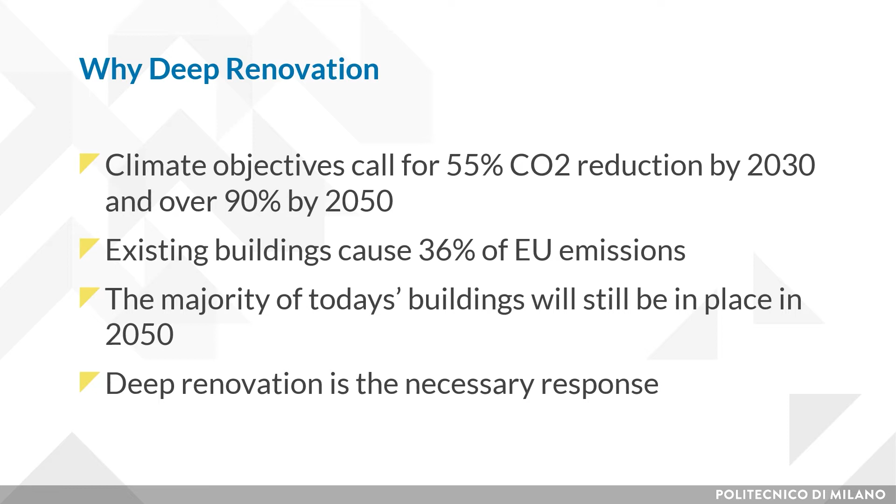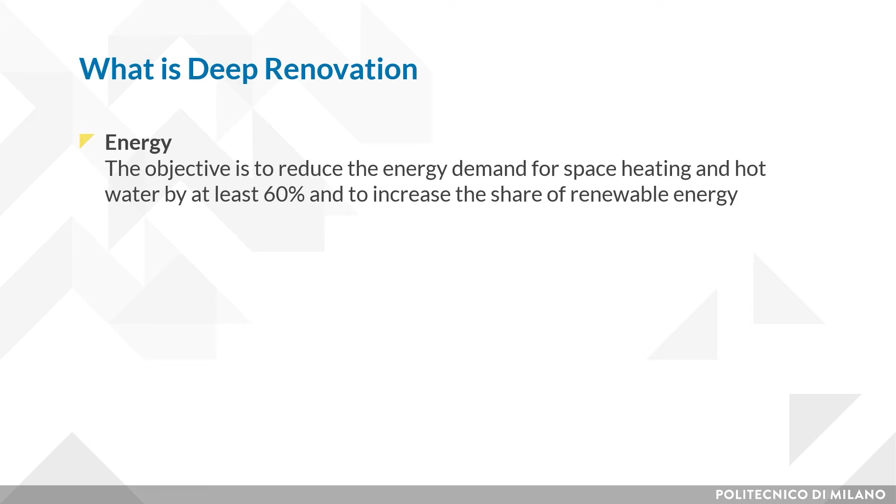Deep renovation can be characterized by a number of key performance indicators. The most important one is energy. The objective is to reduce the energy demand for space heating and hot water by at least 60% and to increase the share of renewable energy. But equally important, it is to achieve comfortable and healthy indoor air quality and good indoor temperatures, both in cold seasons and in warmer seasons.

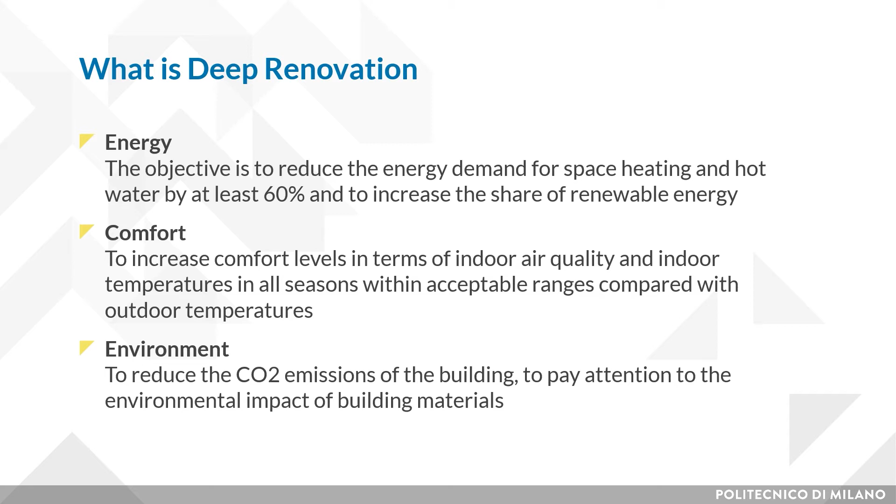Deep renovation is also important to reduce the CO2 emissions of the building, in the first place by extending the lifetime of buildings, but also to pay attention to the environmental impact of building materials which are used for deep renovation. When doing a deep renovation, there are of course risks, and they can be dealt with by integrating multiple components in elements so that there is an optimized prefabricated process before complicated components are being mounted on site.

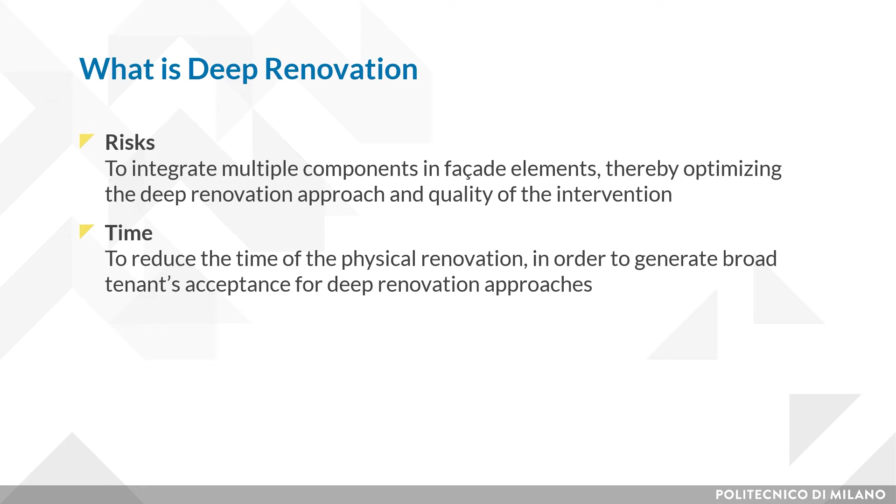It's also important to reduce the time of the physical renovation in order to generate a broad acceptance among tenants for a deep renovation approach. And finally, the costs are important. Deep renovation can be facilitated by prefabricated elements with the integration of many components, and this can help to achieve affordable building exploitation cost and affordable cost of living for tenants, and thus avoiding energy poverty.

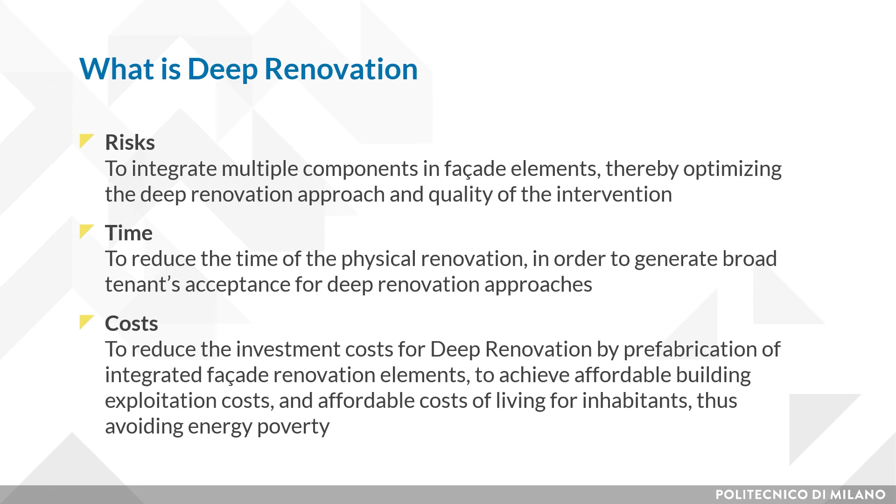The general method and approach that has been chosen in Horizon 2020 research projects is to look at different building archetypes. And also a project called 4RinEU has done the same. And this project made use of the TABULA building archetypes that had been defined under a previous program. And in 4RinEU, the geometries of those buildings have been taken and they have been adjusted to context-related thermal properties, both in terms of climate and typical construction methods.

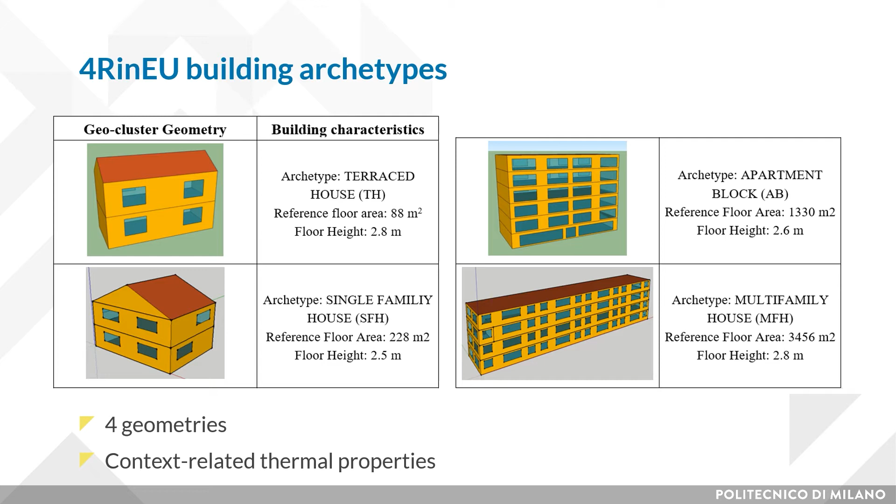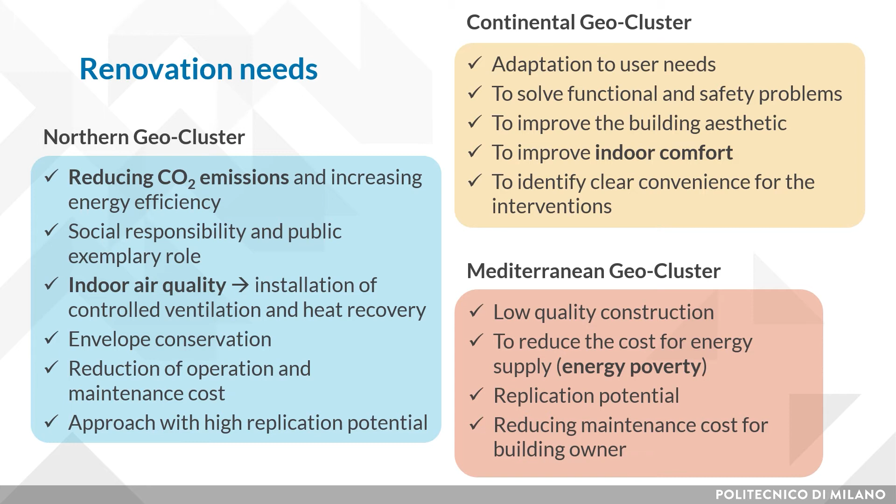Europe has been divided into geoclusters, and geoclusters are countries or member states with comparable climatic conditions, and these geoclusters have been used to study the deep renovation concepts. The renovation needs in those clusters have been taken as a starting point, and these renovation needs vary from project to project, of course, but they also vary from region to region. And to highlight a few, in the northern geoclusters, reducing CO2 emissions is an important one. In other areas, avoiding energy poverty is an important one. And in all cases, indoor comfort is a relevant one to address.

The following technologies for deep renovation have been studied in 4RinEU. The first and most important one is the prefabricated facade, which contains super insulation, good window frames, and the addition of shading systems where necessary. But there are more technologies that are also important to achieve a good performance. And the first one is to address summer conditions and to add, for instance, a smart ceiling fan in order to have a better individual control over conditions in summer.

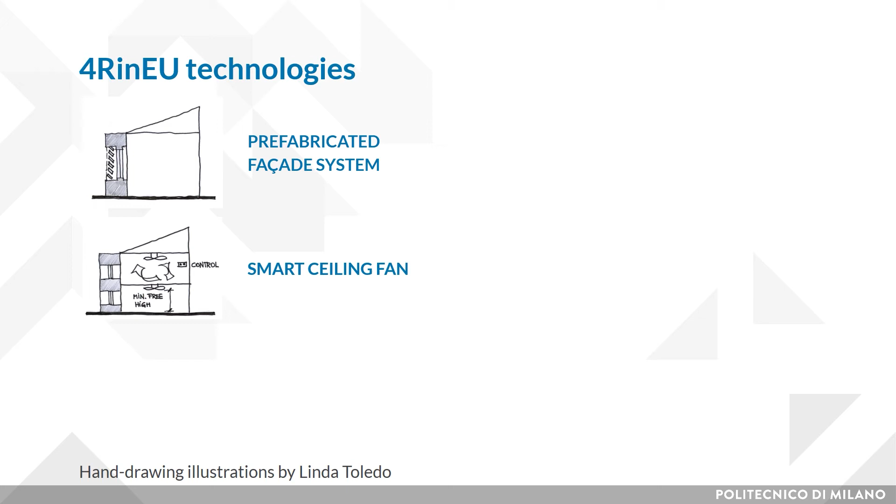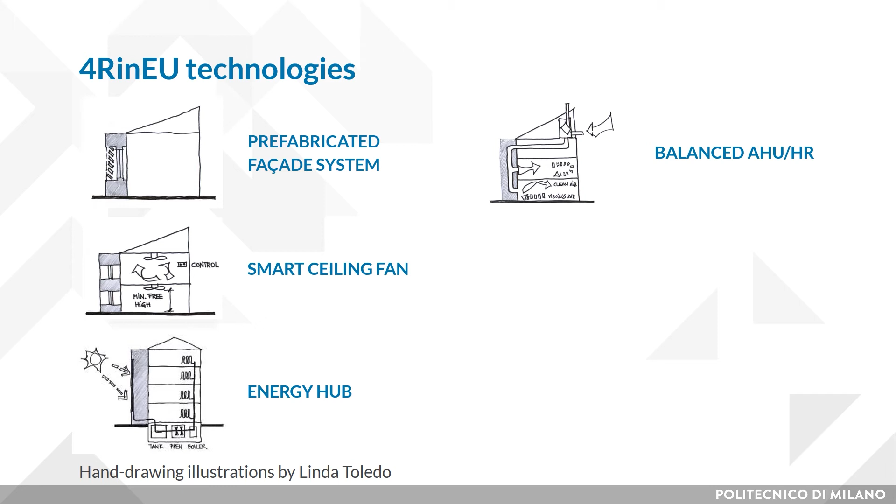The third one is the use of a so-called energy hub. Many buildings have a collective or communal heating system which can then be distributed better, making use of a so-called energy hub. The fourth technology is the use of balanced ventilation with heat recovery to make sure that there is enough fresh air in the apartments, but also to make sure that the heat of this ventilation air is recovered. Heat recovery can also be integrated in the prefabricated facade. In this case, we talk about decentralized solutions, because it cannot be a whole house ventilation system that you do in a facade for one apartment.

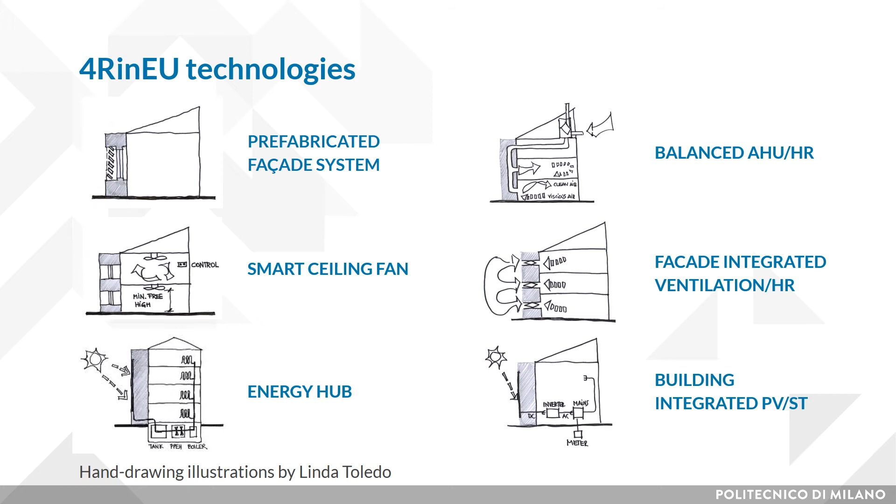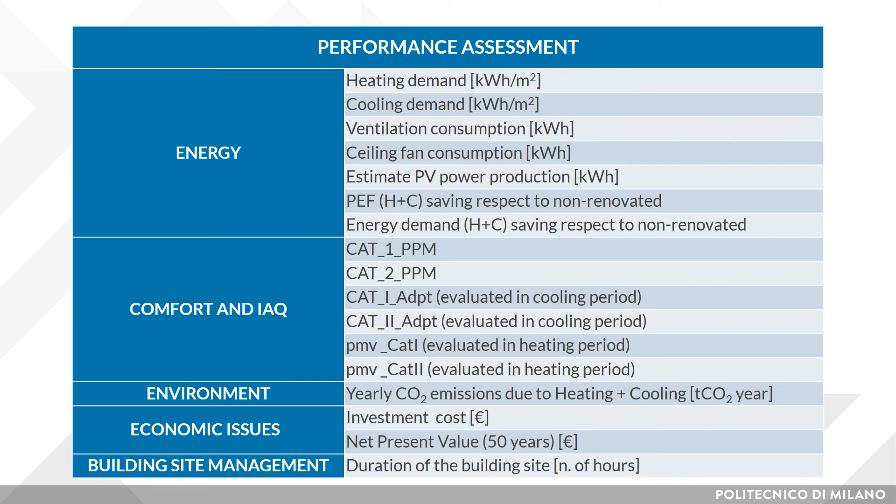And finally, the project has addressed the integration of renewables. This could be either in the facade and be integrated in this prefab facade, or in the roof. And the project has addressed both PV and solar thermal systems. All of this has been combined in deep renovation packages, where a performance evaluation has been made on the different key performance indicators that were introduced in the beginning, and they are listed here again in detail.

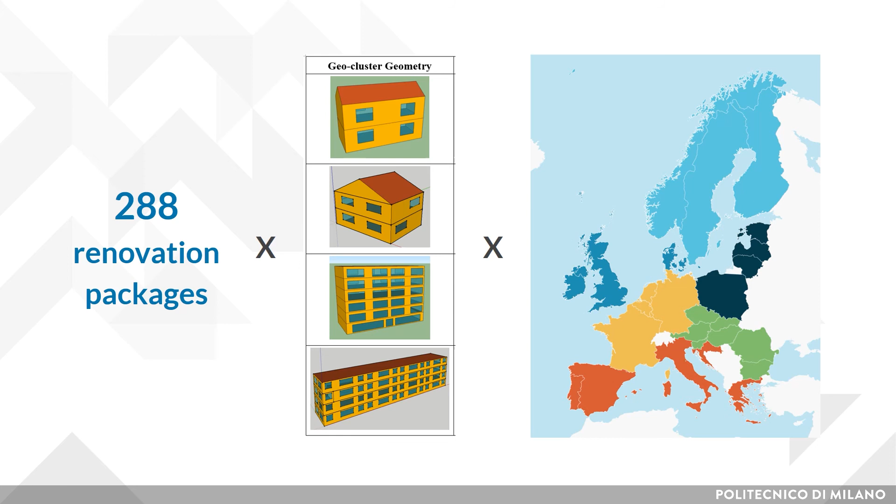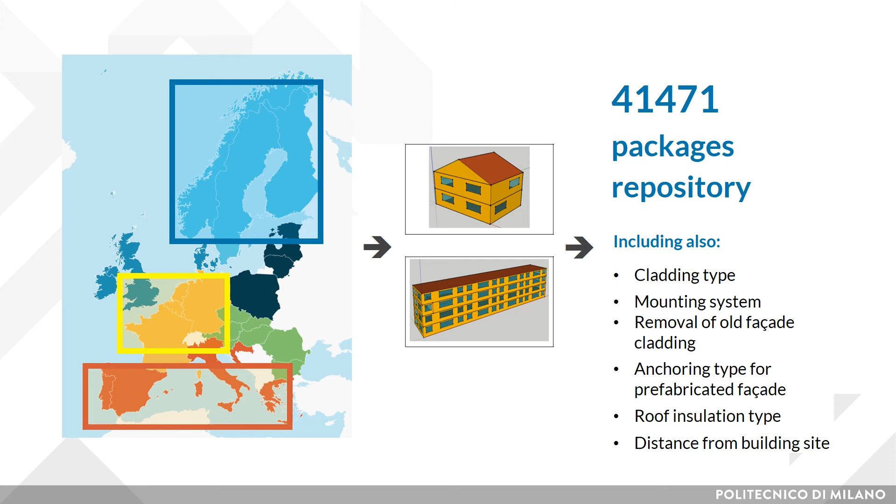And that resulted in 288 renovation packages times the different building archetypes that have been studied times the 6 geoclusters, and that resulted in a huge number of packages which are possible in the different areas and different geoclusters within Europe. And this is a huge information database that can be used as a starting point when planning a deep renovation in your own situation.

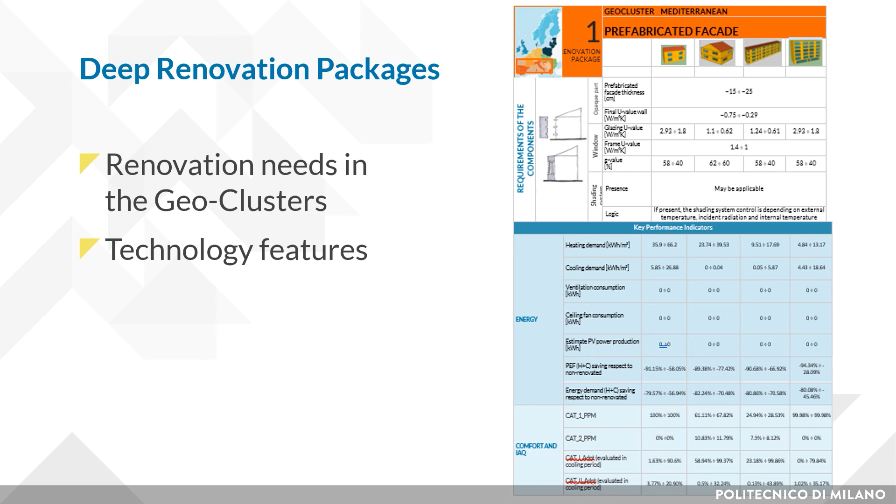So to summarize, a deep renovation package is characterized by the renovation needs in a geocluster, by the technology features that can be part of it, and it provides information for designers, and there are key figures in terms of performance that can be expected. And such information is a good help as an initial starting point to start a deep renovation project in your situation.

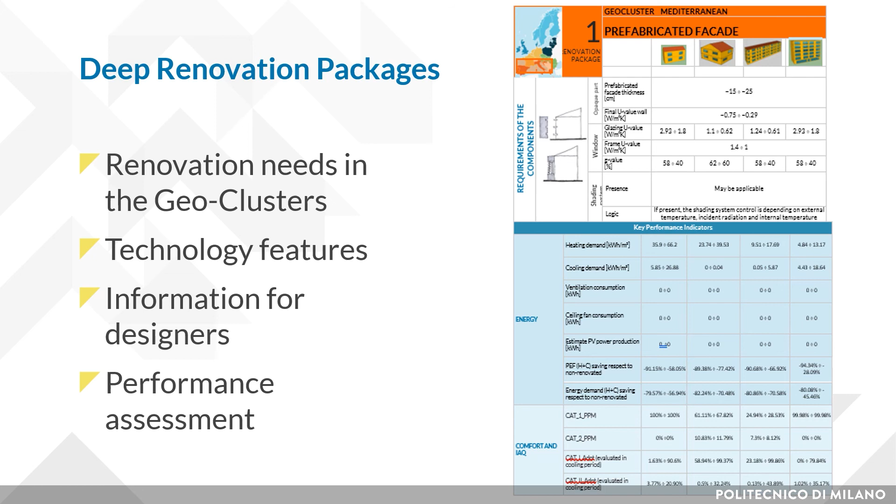Finally, I want to introduce two recent projects. These are projects that have been carried out in 2020 in the Netherlands. The first one is an apartment block of 76 social apartments in Zeist in the Netherlands. And this project, called Flat 11, has been renovated with a super new facade using triple glazing on both sides of the building, addressing thermal bridges. And this building is heated with a compact heating and ventilation system that includes a heat pump for hot water and space heating production. Every apartment has its own compact heating system thereby.

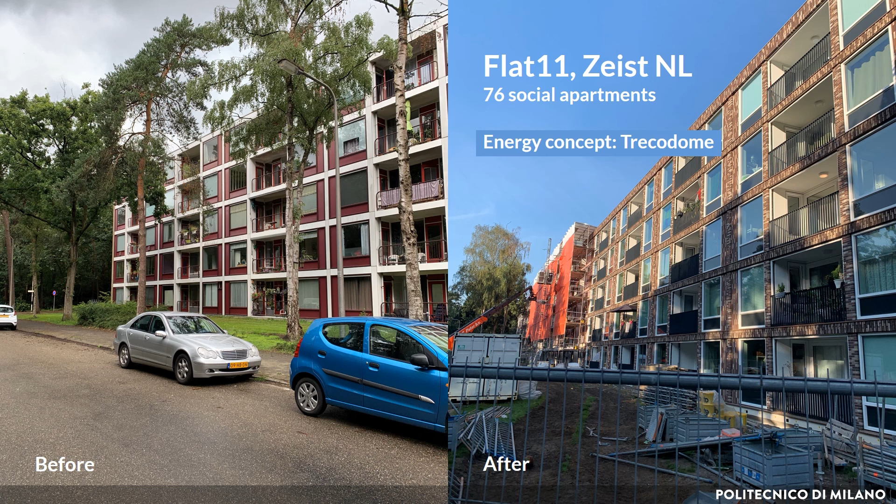And the last one is a project which started in 2020, which is the renovation of 194 social houses in Goesepolder in Goes. And in this project, the originally brick buildings will have a new prefabricated facade designed by the consortium Built for You, and this project will have a super performance at the end because of the low energy demand, the good ventilation, and the integration of solar PVs in the roof.